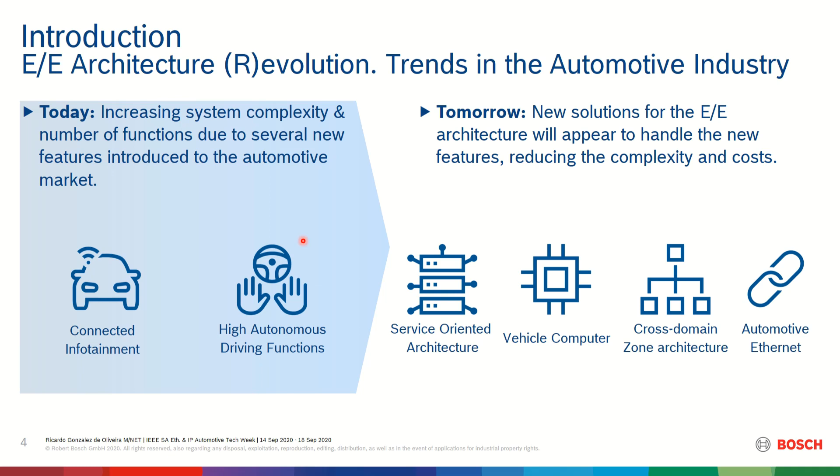Here I have some examples of solutions. First, the service-oriented architecture that makes the separation of services and signals hierarchical in the vehicle. Or here, the usage of high-performance vehicle computers to run those intensive data processing new features.

Here we have an example, the use of cross-domain zone architectures in a way that you can optimize vehicle development. And finally here we have this increase in the usage of Automotive Ethernet that is able to handle this huge amount of data necessary for those new features.

And we have new protocols, for example the TSN protocols, the time-sensitive networks, that can guarantee the real-time requirements for such systems. As a result of those solutions and all this new complexity, we have even more awareness of the cross-cutting concern from the features, making the development of cyber-physical systems quite complex.

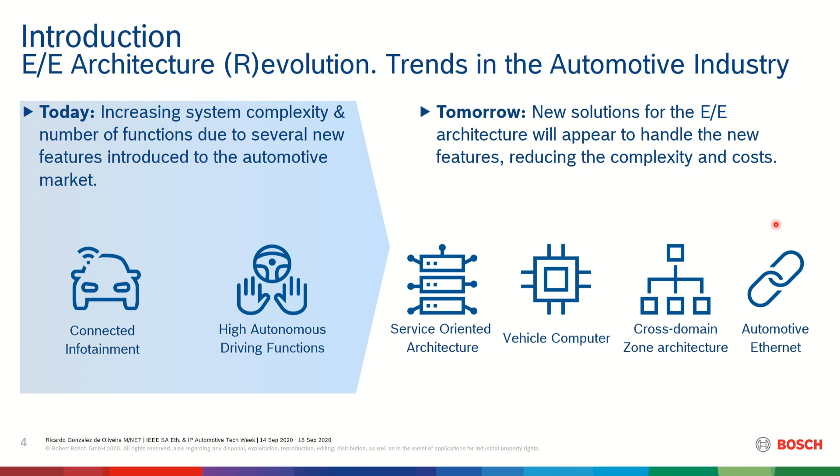Cyber-physical systems are systems that require co-engineering between multiple fields of expertise. As you can see in that figure, for the automotive cyber-physical system example we have software, controls, network, and mechanical disciplines.

In the last slide, I said that all those new trends coming to the automotive industry are quite related to cross-domain functionalities. If you think in terms of cyber-physical systems, we can think how a change in my software discipline, for example, what happens if I change my software runtime, how that's going to influence my controls stability.

And here again we have the same problem: it's not quite clear where the border is from one discipline to another. So we can say we have a gray zone, some fuzziness here in the middle of those disciplines. The name of that is cross-cutting concern, this idea of how a change in one domain or discipline could affect the other discipline.

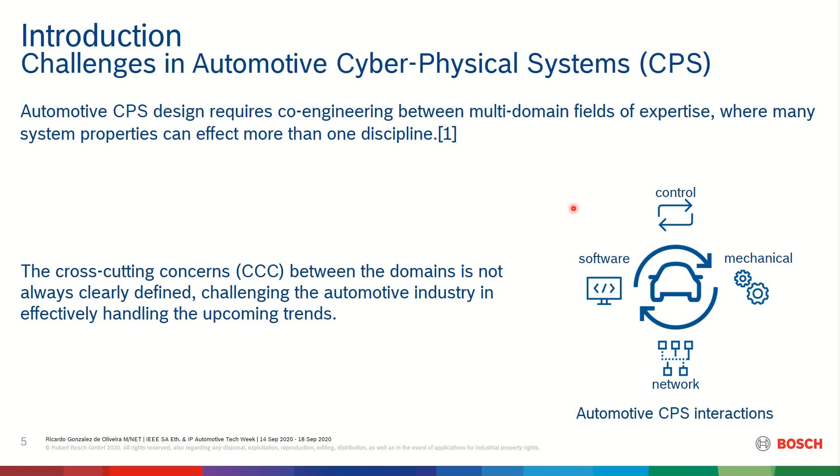One possible solution to overcome those problems of the gray zones is the usage of design contracts. The usage of design contracts can bridge the gap between the disciplines' interfaces, giving a clear statement of the assumptions and guarantees of the interfaces and interactions. The design contract will give you an assertion for the interdomain exchange of information.

As an example, you can think of a control loop where we have some timing agreements between the control design and the runtime environment. For the runtime environment, we can think of our software and network layers. Any delay or jitter on those layers could jeopardize the stability of my system. And that's why we need some guarantees for the timing properties, to make sure our control loops work as expected.

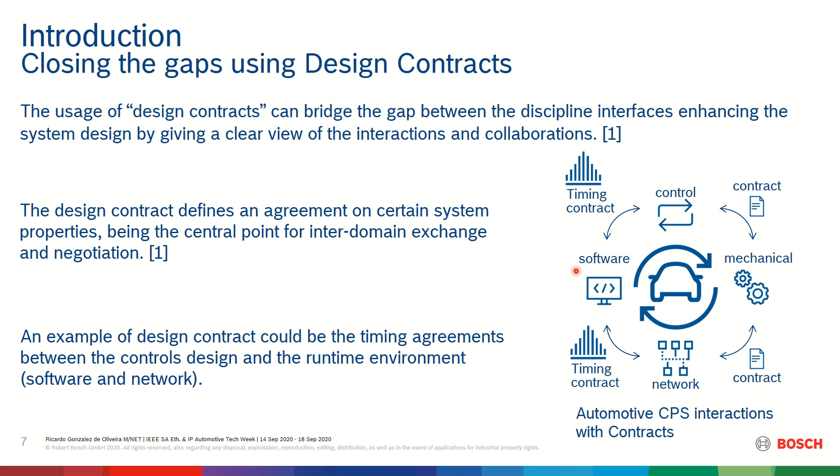In this simple example, I have cited the usage of timing contracts, where timing is a key point in the quality of service for distributed systems.

Now we'll talk about quality of services for in-vehicle communications. Quoting a definition for quality of service, we can say quality of service is a measure of the ability of network and computing systems to provide different levels of services to selected applications and associated network flows.

How can we think about quality of services for in-vehicle communications? For in-vehicle communications, we have a composition of inter-ECU communications and intra-ECU communications, where ECU stands for Electronic Control Unit.

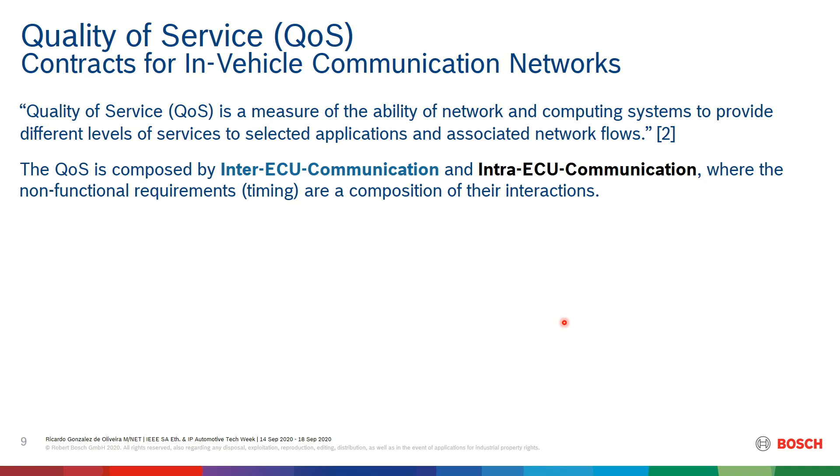Intra-ECU communications are related to the communications inside the ECU, for example access to a memory block or exchange of information between the base software, the runtime environment, and the application layers. We can say that the timing properties are affected by a composition of those interactions.

As I said in the last slide, in this control loop we have interaction between the networks and the software. So we can think that the stability of my control loop is somehow related to inter-ECU communications and intra-ECU communications, where for inter-ECU communications we can think about the delays from the sensor to my controller and to my actuator, or when you think inside the ECU where my control loop is running, how is the schedulability of those tasks.

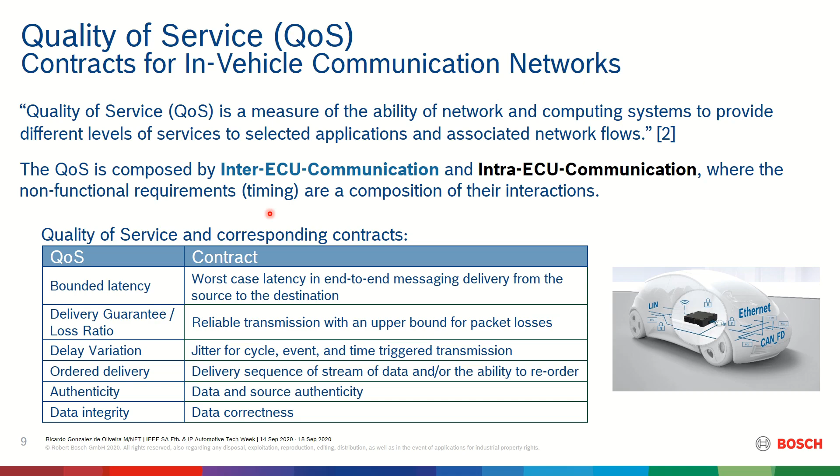Here, for the framework to virtually validate quality of service contracts, we start with our collection of the functional requirements and the related quality of service contracts for them. With those requirements in mind, we can build our system architecture. Normally, we build a system architecture with our best know-how to fulfill those requirements.

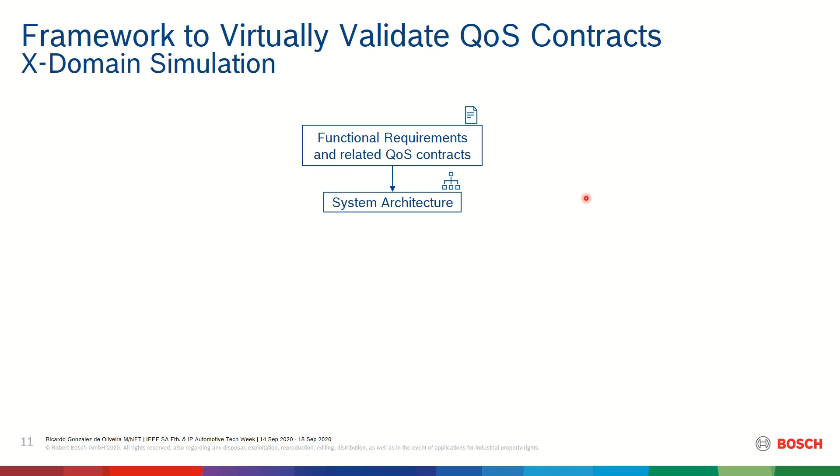If you think about the last slide that was talking about inter-ECU communications and intra-ECU communications, we can think that in our system architecture, we have some simulations related to the network, which means the inter-ECU communications, and we have some simulations related to the ECU timing, which means the intra-ECU simulations.

Here we have two worlds, the inter and the intra world. A way to couple these two worlds together is to have the definition of timing models in a way that we exchange the properties from the inter-ECU world to the intra-ECU world.

As an example, we can think about Ethernet communication. Ethernet communication is a non-deterministic communication. That means normally we have a normal distribution for the delay of the frames, where normally we have a mean time for the delay and we have some jitter related to this message.

Here is one example of one timing model that we can exchange between the network simulation and the ECU timing simulation. Of course, if you want to enhance our simulation tools or to say that our simulation tools are more credible, we can check the boundaries of our system with some error injections.

At this level, we already can do some validations of our timing contracts to see if your quality of service contracts, or some of them, are already fulfilled.

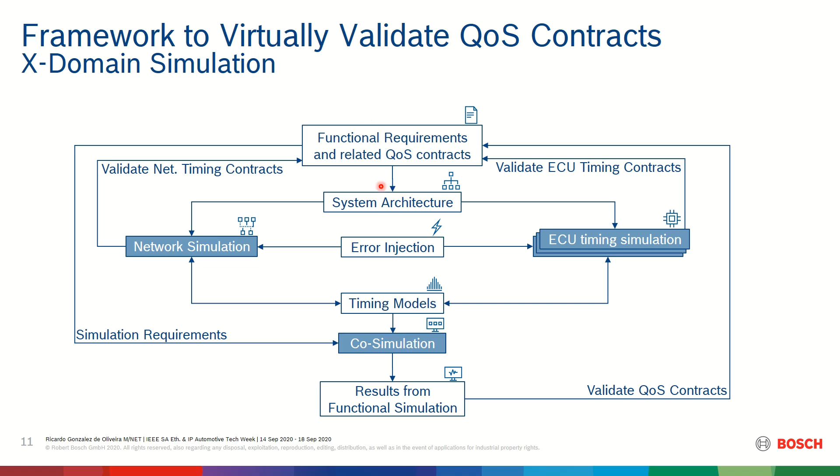As a proof of concept for the framework that I just presented in the last slide, we are going to use the autonomous emergency braking system as a use case. First of all, how does the autonomous emergency braking system work?

The AEB functionality activates the vehicle brakes when a collision is imminent, despite any reaction by the driver. That means we have our vehicle with the AEB functionality, and it's detecting if we have a car in front. If this car detects that it's going to crash into a car in front, the functionality is going to send a message to the driver saying, hey, you have to brake, we are going to crash.

If the driver is still doing nothing, the functionality is going to apply some jerk to the brake pads to shake the car to see if the driver takes an action. And if the driver still does nothing, then the AEB will take full control of the brake system and is going to brake the car.

As a function requirement, we desire that after the AEB maneuver, the car brakes with a safe distance higher than 5 meters. The question here is: how do my timing properties in my system affect my function requirement? In other words, how do my delays in my communication lines and my intra-ECU communications affect this function requirement?

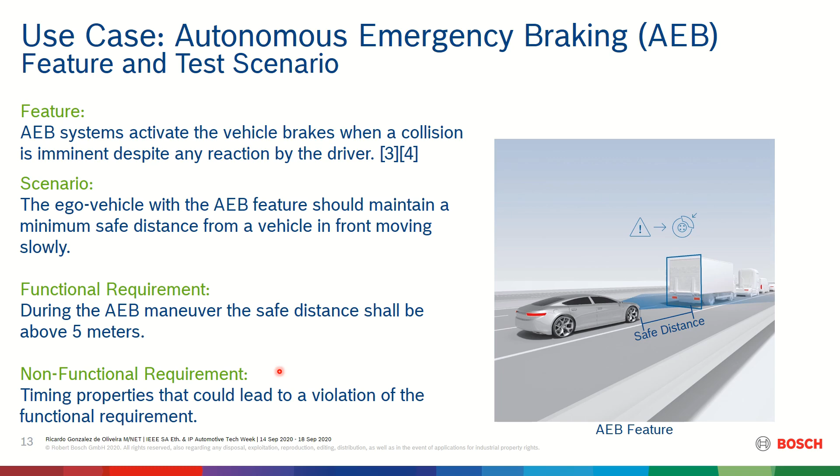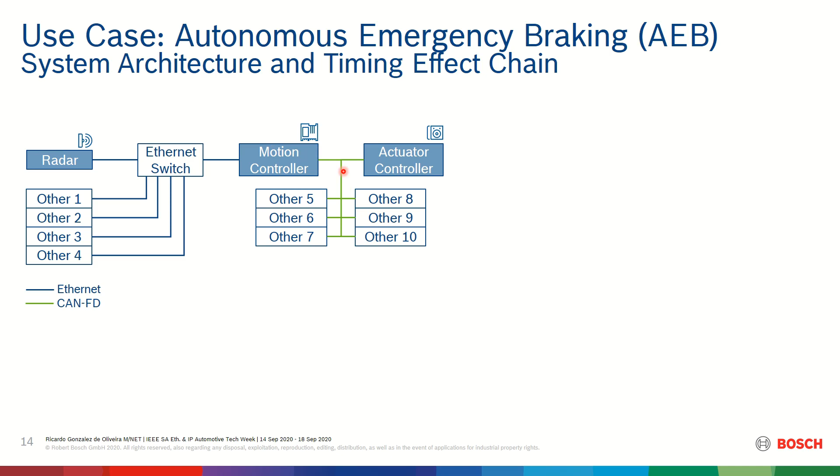This communication here is done by a CAN-FD bus. And again, we have some elements connected to this bus as well. We can see that for the AEB functionality, we have an effect chain - we have the radar that sends messages to a motion controller that sends messages to the actuator controller. And on those communication lines, we have other elements as well.

Those other elements are fighting for the bus as well for their functionalities. And the question is, how do those other elements, and how do my radar and my motion controller frames, affect my whole functionality, because we have some delay related to those communication lines. That's what I want to show in this picture.

We have some delays because of this non-deterministic behavior of the Ethernet, and we have some delays because of this non-deterministic behavior of the CAN bus. And here I want to show that we have what I call end-to-end latency. So we have a latency from the radar finally reaching the actuator controller.

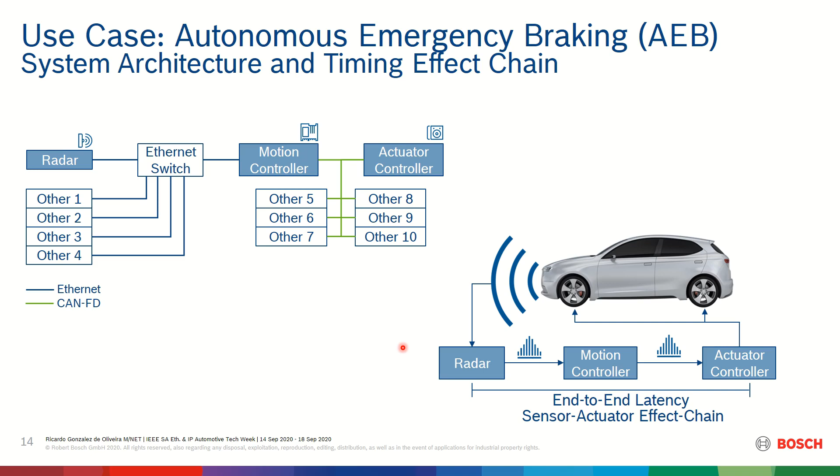As part of our simulation environment, I want to understand what timing properties we have in this end-to-end latency, or as I show here, the sensor-to-actuator effect chain, that could lead to a violation of my function requirement that the distance is above 5 meters.

To virtually validate our AEB feature, we set up this co-simulation environment - I call it a co-simulation environment because we have some tools related to the cyber world, for example virtual ECUs that are able to simulate software embedded in the vehicle controllers, and we have some tools that are able to simulate the physical world. Here we can see that we have radars detecting signals from the real world and sending this information to my motion controller. And then my motion controller is going to send messages to my actuator controller.

For the timing models, we are using a network simulation environment. We can build up this network environment because we know the traffic that our system architecture is going to handle. Here, on top of just simulating our normal case, we want to understand how we can degrade our communication channels, or how we can increase our delay and our jitter in a way that we are going to have a violation of our functional requirement.

That means how bad can my communication lines be, when my car brakes, that I end up closer than 5 meters to the car in front.

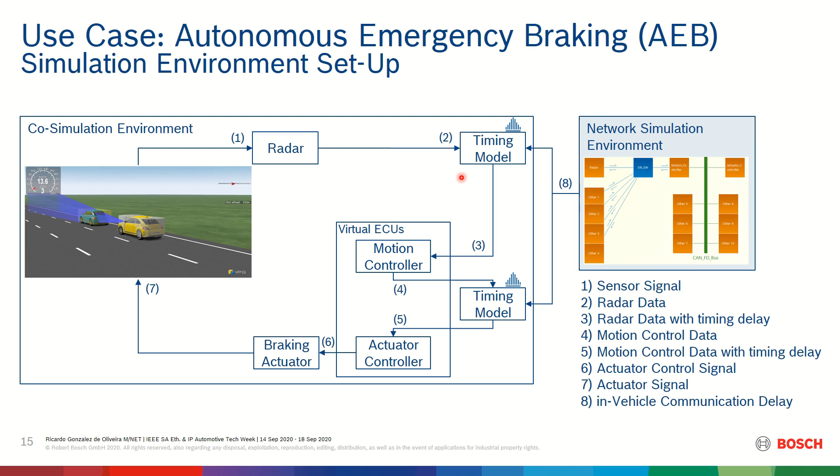Now I'm going to present the results from our simulation approach.

For this scenario, we construct, for example, a traffic jam because of a construction site, where we have a speed limit of 30 kilometers per hour. Because the ego vehicle is increasing speed over time, it's going to crash into the vehicle in front, and that's where the AEB functionality has to stop the car in case the driver does nothing. In our case, the driver is doing nothing.

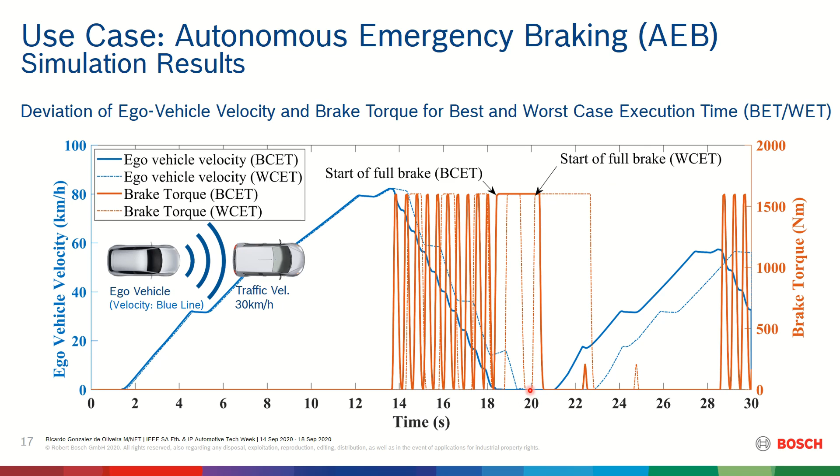So, as a summary, for our AEB functionality in this scenario we built, to have a headway distance higher than 5 meters as our functional requirement, we have to set up our quality of service, or non-functional requirement, such that the end-to-end delay is lower than 500 milliseconds.

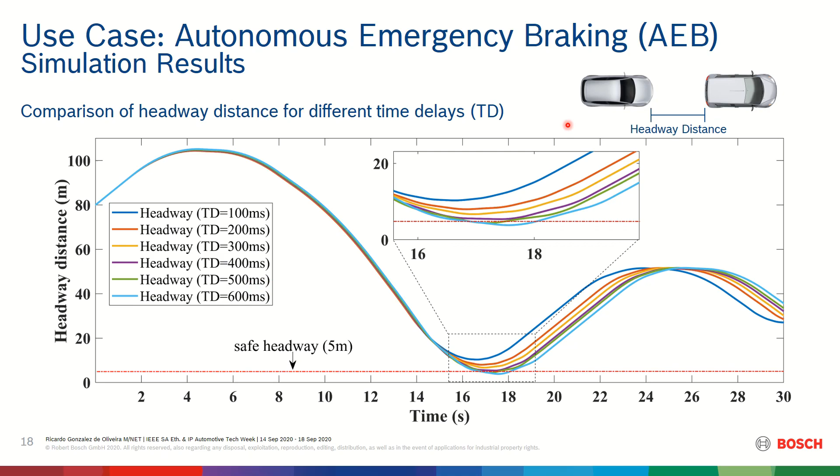Okay, now I'm going to present the conclusions to finish my presentation. So, what do we have for the conclusion?

This work proposes a framework to virtually validate quality of service time contracts for automotive cyber-physical systems. I showed that the vehicle is a multi-domain cyber-physical system with rich interactions, where it's quite complex to understand the borders between the domains and the systems.

I showed that most of the new trends coming to the automotive sector will increase even more the complexity of vehicle systems, making new approaches for system validation necessary.

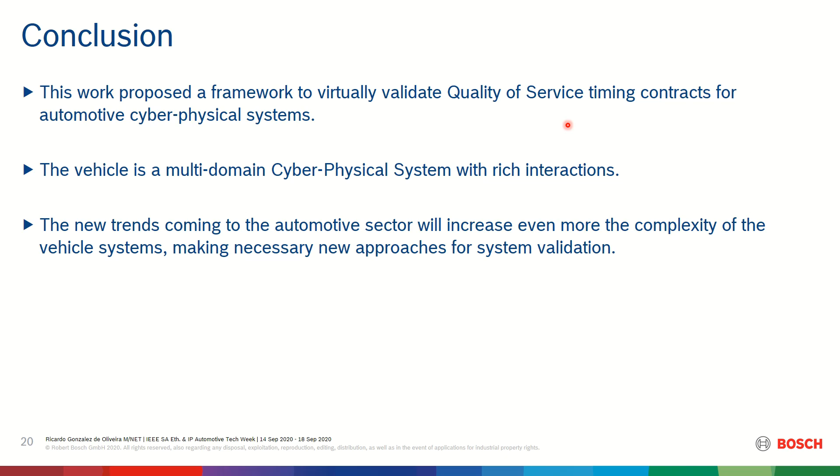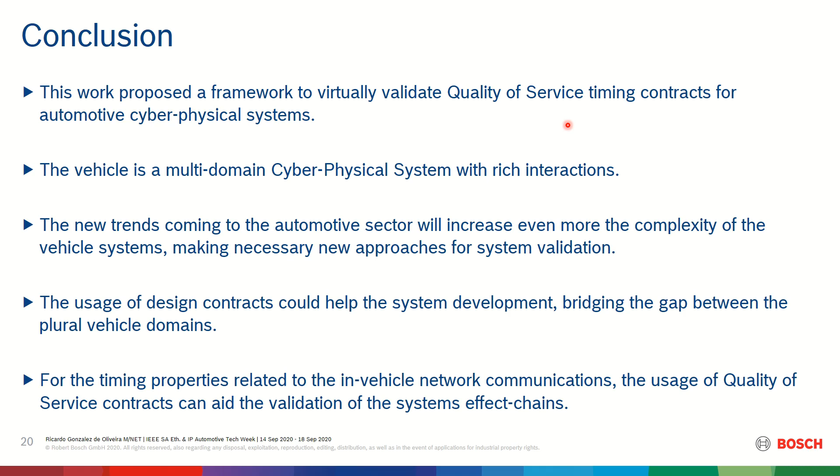I showed that the usage of design contracts could help system development, bridging the gap between the plural vehicle domains. Finally, for the timing properties related to in-vehicle network communications, I showed that the usage of quality of service contracts could aid the validation of the system's effect chains.